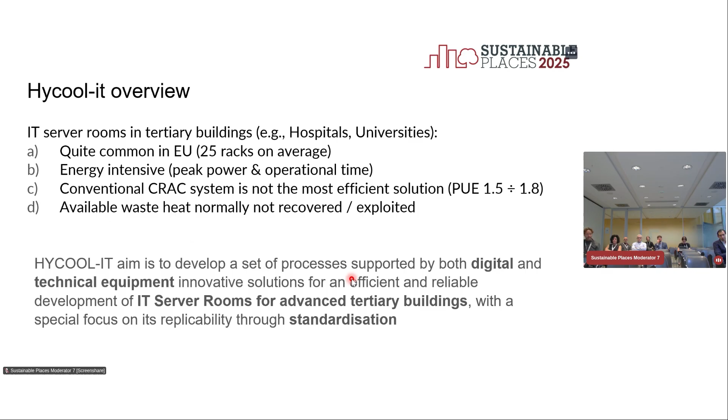So in our HYCOOL-IT project, a European project of 3 years, we are now in the middle of the project. We are trying to tackle it from a different point of view with digital solutions, but also hardware solutions, and then deploy and exploit it in terms of standardization.

The consortium is made of 9 partners from 5 European countries. From Italy, Politecnico di Milano Department of Energy, CNR where Valeria works, R2M where Sander works, and then we have IMP from Serbia, Sorption Technology from Germany, who developed the absorption chiller, one of the technologies, and we have Comet with Fausto, who is here.

IDP, we have some colleagues around from IDP, and BDTA, the Building Digital Twin Association. We will talk about Symbot, and there are other sessions where they talk about this approach. And then we also have the European Innovation Market, both based in Belgium.

So the objectives are four. The first one is digital: to build the building digital twin, and then to provide it as a product as a service. This is our idea. This digital twin is based on an easy modeling approach, having these symbols, a kind of library where you find components and easily build your digital twin. This is the first pillar.

The second one is about the hardware: developing a rack-integrated absorption chiller done by Sorge, exploiting the waste heat from the server to run the thermal driven cycle. Then we will test it in real operating conditions in our server room in Politecnico. The pilot is our server room at the Bovisa campus, where my office is also located.

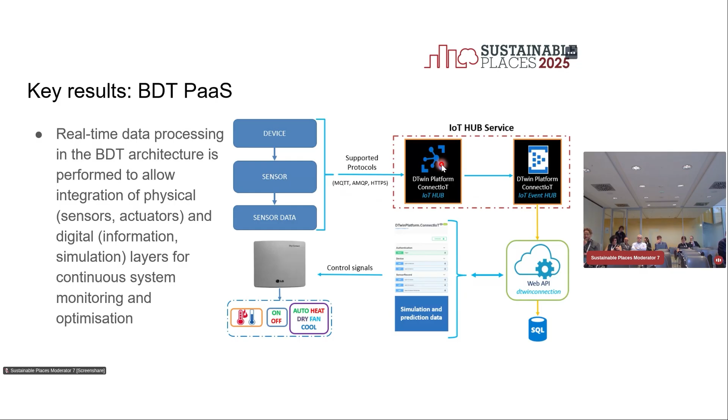Here it's more or less the same, simply looking more from the physical point of view, how it works, and what are the different systems and the different technologies that we are using. But it's again about what I said to you before.

We are working on it, they are working on it hard. They developed the first prototype, they had some issues, and now they are working on the second prototype. Then we will test it in Milan early next year, this is the plan.

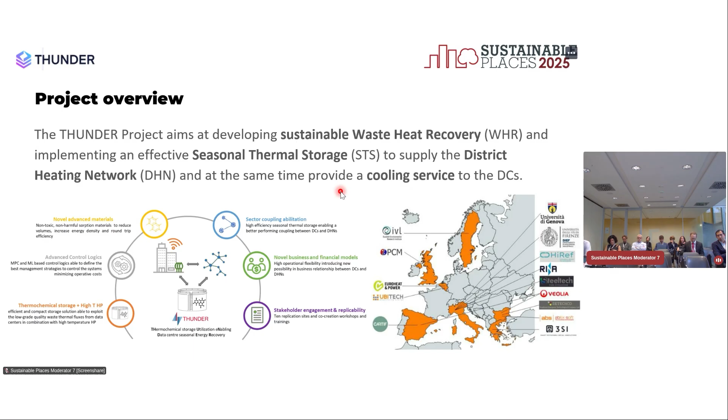So we have this demo site that is a data center with a district heating network. The data center is managed by Avelik Soft, a software company in Bulgaria. And Veolia is managing the district heating network, again in Bulgaria, in Varna. And then there are a lot of other companies involved in the project.

So the main objectives are listed here. Apart from the waste heat recovery and the seasonal storage, we are also testing some systems in order to increase the effectiveness of the storage, like this solar-driven ejector thermocompression vacuum system, in order to create the vacuum into the test cell, into the heat exchanger for the thermochemical storage, to increase efficiency, as well as some other devices that we are introducing in order to increase the capacity of the system.

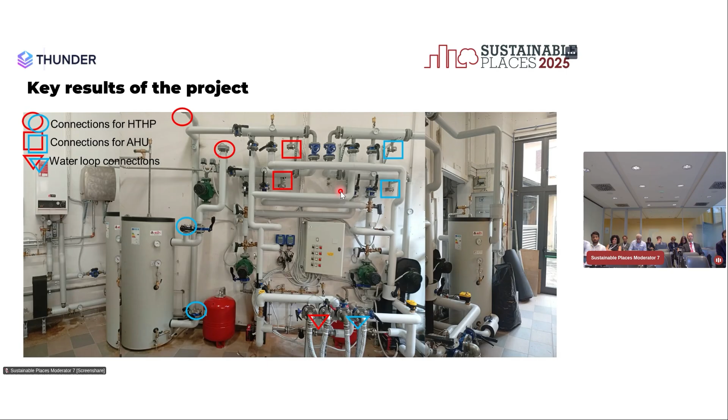Of course, there will be a lot to say, but only 45 seconds are remaining. This is their facility again at Unifi, University of Florence. They are testing several materials, how they perform when hydrating and when dehydrating.

And this is a sort of summary of where we are now. So we are testing TCM 71, that is calcium chloride with a vermiculite matrix to host the calcium chloride. Then they tested the performance of this salt together with vermiculite, and they found nice results. But then, due to some problems in hydrating and dehydrating and heating up and down the vermiculite, we are moving to silica gel.

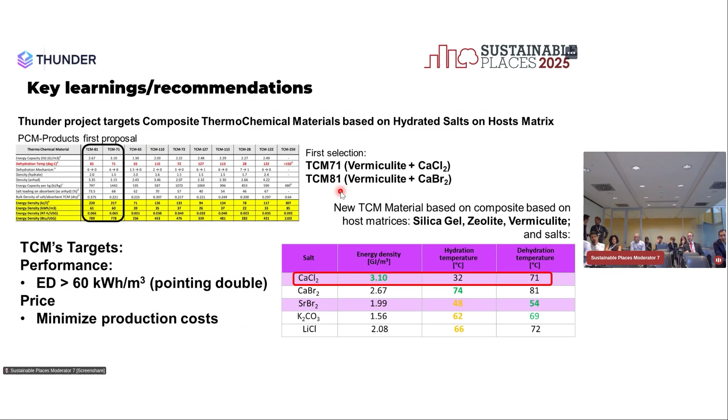Silica gel as a matrix that can host the salt, that is the thermochemical material. And we are finding that the silica gel solution... okay, I'm quite close to finish. They are finding that the silica gel as a host matrix could work even better than vermiculite.

And to close, yes, but this is just to mention the design phase. We are dividing the system into several components. This is quite similar to the other slide. Just to say that we are also designing the control part that is quite important to define as an objective of the project. Thank you, and see you later.

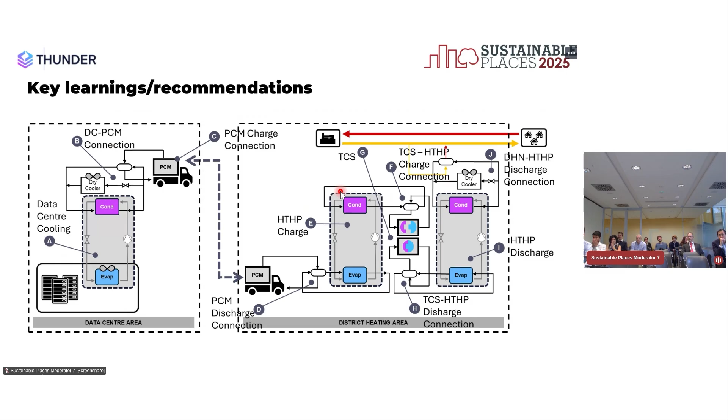Good morning, everyone. Thank you so much that I get the chance to present our Horizon project, moderator. My name is Yannick Graben. I'm from the Competence Center for Thermal Energy Storage in Switzerland, in Lucerne, at the Lucerne University of Applied Sciences and Arts.

To give a quick overview of the moderator project, the way we work with data centers is we focus all on the waste heat recovery system. We work with an immersion cooling system where the goal is to achieve a system with the highest possible temperature without a certain amount of thermal degradation of the server racks. Then we use the waste heat, this intermittent availability, and store it in a newly developed phase change material that I will go deeper into after.

The third and last part is actually setting up the insulation material for this storage system. Then we also look into different case studies that we have within the project, so we look at different locations. We determine 3 locations with different server units or different data centers, and there we really look into how we can use this waste heat that is stored in these phase change materials for other uses, such as industrial applications, greenhouses, and so on.

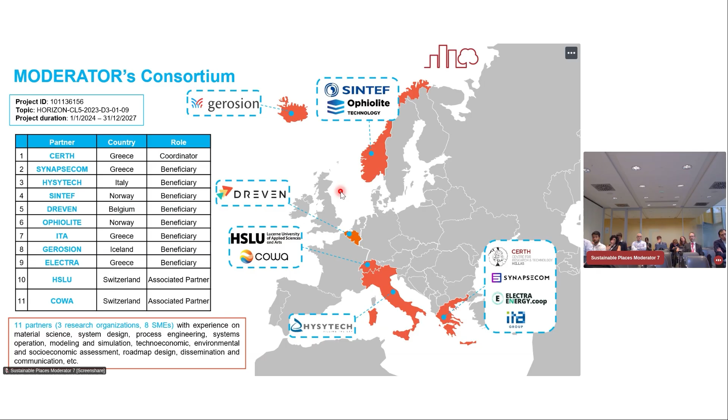What I will go into now is something that we are mainly working on, the material studies that we have done. It's a 4-year project, and we're halfway into the project with the first report that we had to deliver at the end of last year, which was on the material development and testing of these new phase change materials that should be applicable within this temperature range of 40 to 60 degrees, which is what's allowed to operate an immersion cooling unit in.

Then I will also look a little bit into the next task that we have to submit at the end of this year, which is really the system design, so how do we design the immersion cooling unit connected to the PCM storage and how it is operated.

So we have actually developed 3 materials within the project, within this target temperature range. We work with salt hydrates mainly because they're cheap, non-toxic, and available. Basically they're food grade, so they're also used in many food industries. We have 3 materials.

In the end we focused mainly on this PCM 58, at a phase change temperature of 58 degrees C, and PCM 45, where we have now over 1,000 cycles tested of the materials within the testing unit I will show after. In the end, we selected PCM 45 for our first prototype because the phase change temperature is just low enough to be charged with a server unit. There's always this trade-off: if we increase the temperature in the immersion cooling unit, the servers will run less efficiently, but we cannot charge our phase change material otherwise.

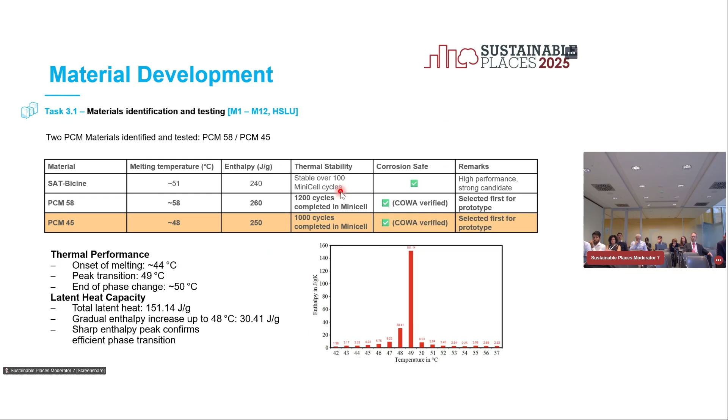Then the second step, how we test this material. This is a setup which is the so-called mini cell setup that was also developed within this project. The goal here is to test PCMs at larger volumes, because everyone that has worked with scale-up production of phase change material knows this. You can test the material in small batches, but as soon as you go into several liters, it behaves totally different.

So this has a volume of around 0.6 liters, and what you can see there is tests all the way on the left is fully crystallized, then semi-charged, so semi-liquid, say 90% charged, and then 50% discharged again, so the crystallization process. Here it's also really important to observe visually how the material behaves. So do we have segregation? Do the additives settle down in the materials and all of these processes?

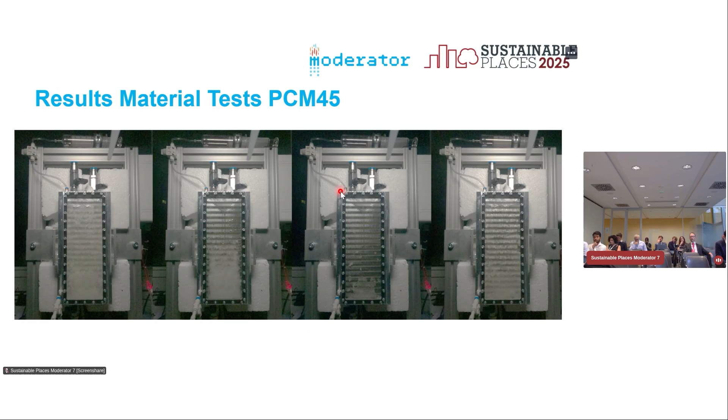Then the next step, what we're going to do with this material - together with COWA Thermal Solutions, we actually developed a larger storage unit, which is this so-called compact cell. It's a 120-liter unit, and within this targeted temperature range, we are able to store around 12 kilowatt hours of thermal energy.

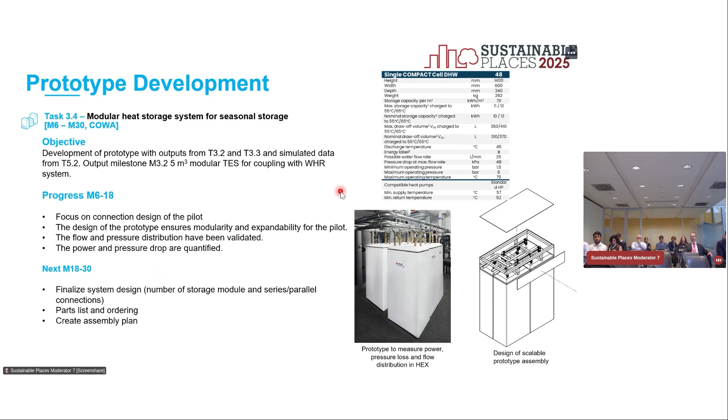To sum up, we have achieved now two materials within this temperature range with a stability over 1,000 cycles. But of course, this has to be tested also close to the application, because all of the cycles were pretty similar - similar temperature distributions, similar kind of boundary conditions. The mini cell that was developed proved its test setup before the real scale up to larger material volumes. It's really important to point out the importance of this PCM testing as close as possible to the application, so larger volumes and different charging temperatures like semi-charged systems and all of that.

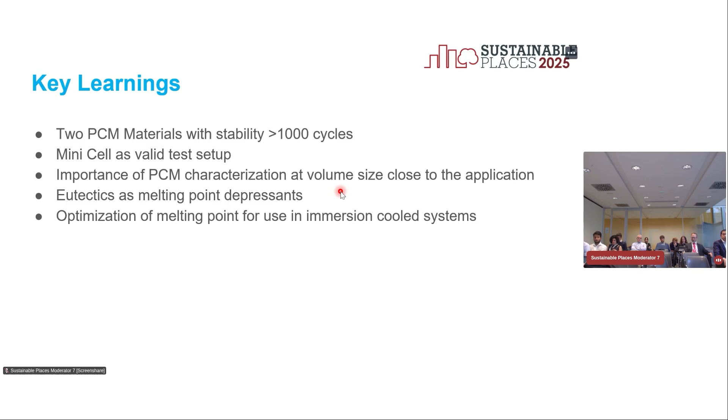We used eutectics to depress the melting point of the phase change material. I will not go deeper into the material composition because COWA still has a patent pending there. It's really important to optimize the melting point for this immersion cooling system to get as close as the operation temperature, but still not have thermal degradation of the server units.

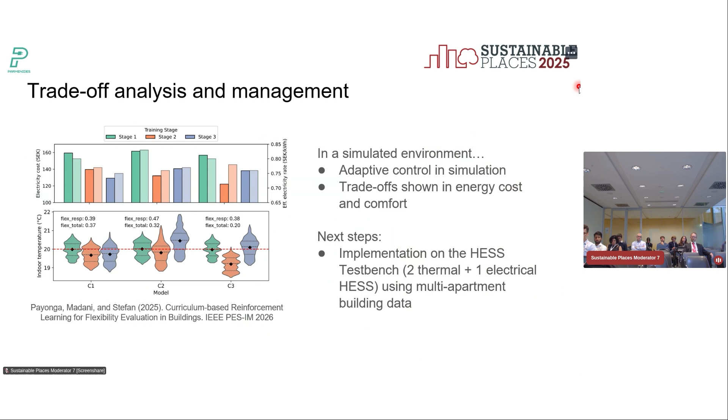So after this, the next step is to implement it. This was tested in a simple simulation environment with a simple building, as a proof of concept, to see how we can actually measure these trade-offs. The next step will be to implement that algorithm on the test bench using multi-apartment data.

Apart from that, there are other project results. The Parmenides Energy Community Ontology has already been done. It was finished last year, and it's now being used by the EMS for HESS developed by MAPS, and integrated in Austria with grid capacity management.

Now, for the key learnings and recommendations: we assert, and we have shown, that there are trade-offs. I think we need to accept that there are trade-offs among optimization objectives, and we have shown, and will continue to show, that these can be measured and managed.

We want to measure them and show this information to stakeholders, because we are also aware that participation of stakeholders in flexibility provision relies upon the assurance of how much they're willing to trade off so they can contribute. Most of the time, flexibility provision is only framed from the perspective of the grid, that you are giving this flexibility so the grid will be safe. But how about the perspective of the user? And we're doing that here.

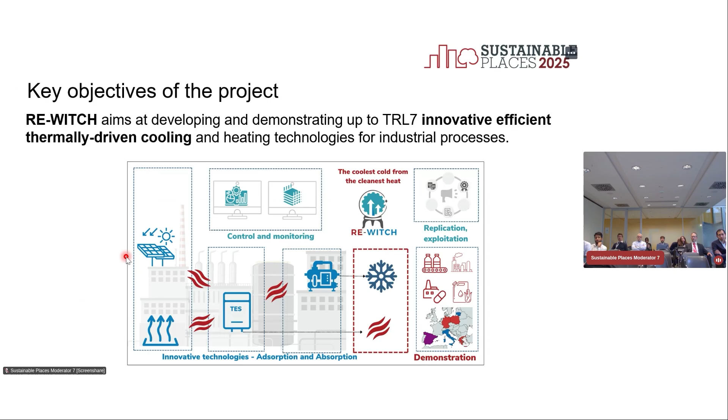The main aim of RE-WITCH is to demonstrate up to TRL 7, 2 different solutions for thermally driven cooling and heating technologies to be used within industrial processes. This is the general scheme of the project. We are now going to analyze this more in detail.

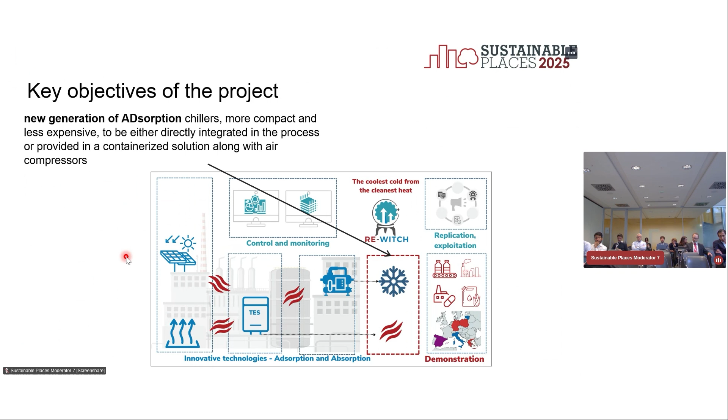The two main technologies that are going to be developed are a new generation of adsorption chillers, which use a solid sorption system that should be less expensive and more compact than the state of the art, able to be integrated in processes or in a containerized solution, and 2 new versions of absorption chillers, working with liquid solutions, that should also be made more flexible in terms of range of operation by including a mechanical compressor.

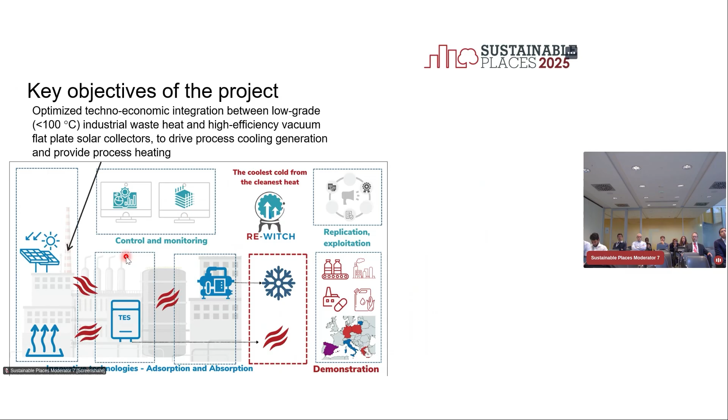In addition to that, there will be a new or best integration with solar thermal collectors. The solar thermal collectors are being developed by TVP, a Swiss-Italian company producing flat plate vacuum solar thermal collectors that can be used in a range between 70 and 130 degrees C. Of course, integration could also be done with waste heat. Then there's...

a PCM-based TES system that is being developed by the University of Birmingham. There are 4 demonstration sites that cover different possibilities. These are a brewery based in Poland, a recycled paper industry based in Lucca, Italy, an agro-food industry in Spain, and a biorefinery in Greece.

In addition to this, there will be 3 replication sites that will test the solutions in a kind of open loop computation. This is the solution on the adsorption chiller, for which we are collaborating with Adsorption Technologies to realize it. It is based on a patented solution by Absorption Technologies, which is a little bit different from the standard systems.

I don't know if you are familiar with adsorption systems, but usually the way they're made is that they have a container where you have the heat exchanger with the material, and a container that could be either in the same vacuum chamber or in two different chambers connected by vacuum valves, where you have the condenser and the evaporator. One of the main issues that has historically limited the power density of this system is that since these systems use mostly water as refrigerant, the condensation and evaporation are quite inefficient.

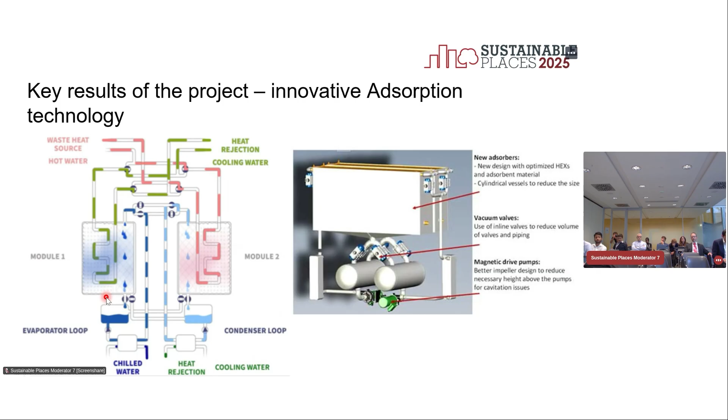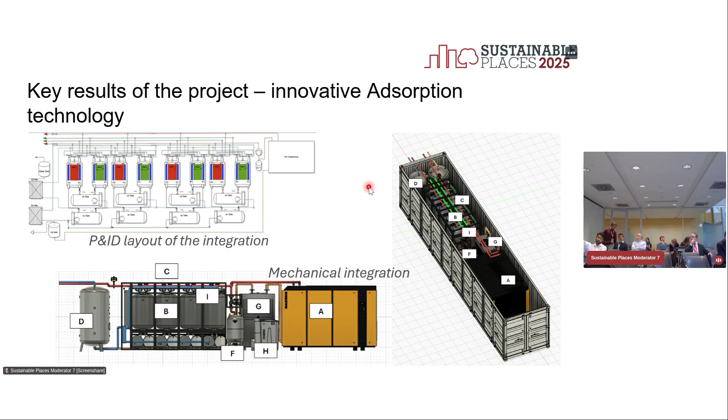This is the design of the system for the various pilots. You can see that this is thought for quite large scale, meaning that each module is 50 kilowatts, so this is a 200 kilowatt cooling system. It was arranged so it can be realized in a single containerized solution that is shipped, pre-assembled at the Adsorption Technologies site, and shipped to the industry. The industry basically just has to connect the water pipes and the electric system, which should improve the acceptance from the industrial sites.

Then this is the solution on the absorption system side. I apologize because I don't have all the specific technical knowledge on this. It's being developed by the Technical University of Munich together with BS Nova, a company from the Bälz Group. This is the absorption cycle in which they included a compressor inside to increase the temperature lift.

This allows providing both heating and cooling at the same time, and also gives a better range of operation. The compressor used is similar to the turbo compressors used in the automotive industry. That's more or less the derivation, and it was designed by TU Munich.

This is the integration that is done with the BS Nova systems. The compressor is connected on the outside, and there's a system used to define the operating pressure level for the compressor. This solution allows very minimal modification to the standard chillers by BS Nova, while greatly increasing the possibilities for the application.

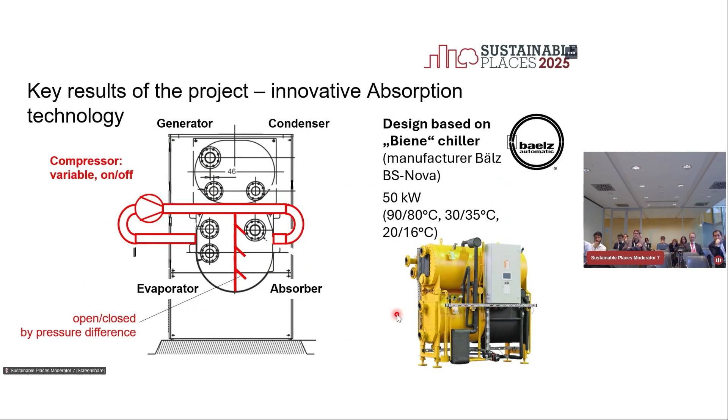Regarding key learnings and recommendations, we saw that for both the adsorption and absorption systems, one of the main problems so far that needs to be solved is finding a way to have a standard or simplified method for designing them, because there is a need for careful knowledge of the process where these systems are being integrated, which somehow complicates their use and replication across industries.

Then it was also seen there was quite a lot of work being done within the project on the industrial stakeholders' acceptance. We saw that all of them asked for proper business models, for example some kind of ESCO-like models, where chiller and heat pump manufacturers need to have agreements also with solar thermal system manufacturers if they want to install the entire technology package. A lot of industries also expressed the desire to have a kind of business model where they could have it as a service.

That's why I was mentioning the ESCO-based model, so you could have zero capex installation, and then the company takes some of the revenue. The companies that install the system could get some revenues out of this. Also, the BIM-based engineering being developed by IDP is an important added value because it really reduces the risk of problems during installation. And of course, there's quite large application potential in different industrial sectors.

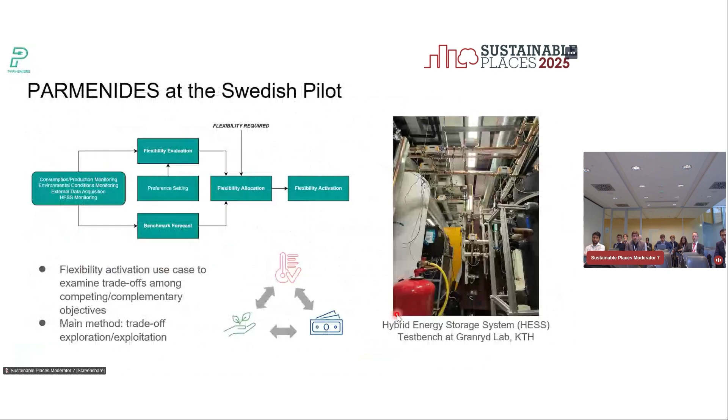And the heat transfer is happening between... so you chase out the heat from the rack on the back side into the surrounding. I missed that, or no, you deliver it away in the water. It's integrated, so everything is inside the rack. There was a scheme, and we're working on it, but yeah, the heat is not going outside.

Then the cold air goes out. So the heat gets into the lower part, into the absorption, and it's used. So we have 3 temperature levels.

The high level, the low level, and the medium level that is here, which is projected then outside. In my final slide, I said we can also recover this medium heat, but it's around 30 degrees C, while this one is around 60, and this should be around 20.

So this 60 degrees you bring to the adsorption module and use it to drive it. That is the fuel, let's say, of the absorption. And then you get out practically how much? 30. The medium, 30, into water.

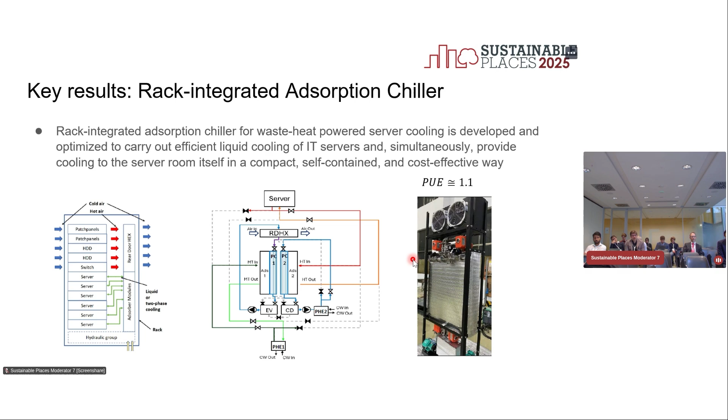Do you have some kind of guess data for the total cost of ownership of one system versus other transportation systems like pipes? This is a very good question - I don't have the answer at the moment, but we made some calculations and found it at least feasible from an economical perspective, given the short distance between the data center and the distributed network. But the idea is to be flexible, not only to supply the data center's distributed network, but any other.

So practically you can have a diverse client group, not only like a pipe serving one client. Exactly - this is also a point of interest regarding the heat on wheels, that you don't have only one client, but you may have several, and in this case you can also optimize the costs. That's very interesting - I would like to speak with you about this. If you want more details, absolutely, you can email me.

But there are cases where they are already transferring heat, not all the district. There is some district heating pipes, but part of the clients are being served through this. Because some clients, in some conditions, it's better to have spot supply of heating instead of direct connection. As you are saying, the capex are lower, and it's only a matter of OpEx that maybe are higher, but it's a business plan that in some cases is more profitable.

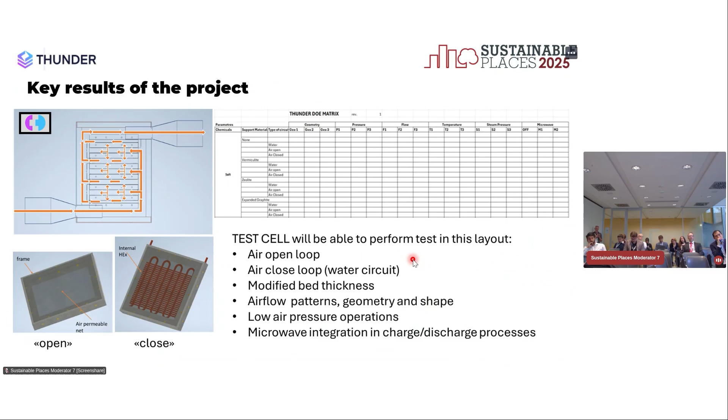Water lines, so why do you have an open system with air for the TCM? No, because we are testing both possibilities, to have water circulation in an enclosed loop, but also air. So this is something that is being tested at their facility, and then according to some results we will see whether to use this water exchanger or air, which needs another exchanger.

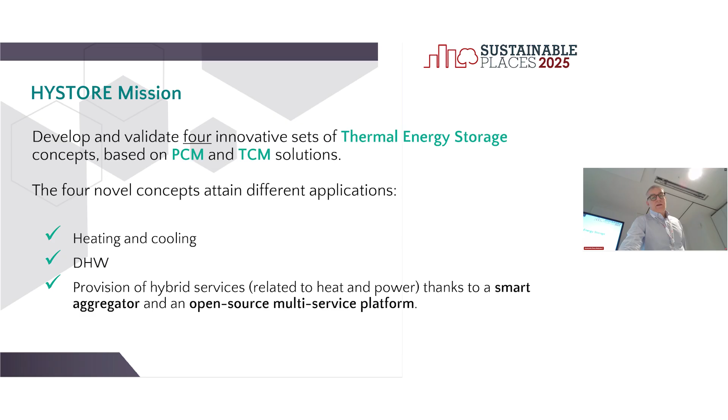Important things that I have anticipated at the beginning: we want to improve the integration with the grids and increase the flexibility by collaboration with an aggregator that will exploit an open source platform developed by a partner. The objective of the project is to increase the energy density with respect to the state of the art of thermal energy storages, reduce the capex, which is one of the bottlenecks of innovative PCM or TCM solutions. To bring it to TRL9, we want to enhance installation efforts and create a business model that can be compared to lithium batteries' prices and market penetration.

Here you can see an example of what we have now. So we have some thermal energy storages integrated at building level and the grid connected to the building. So we don't have a direct connection between thermal energy storage and the grid.

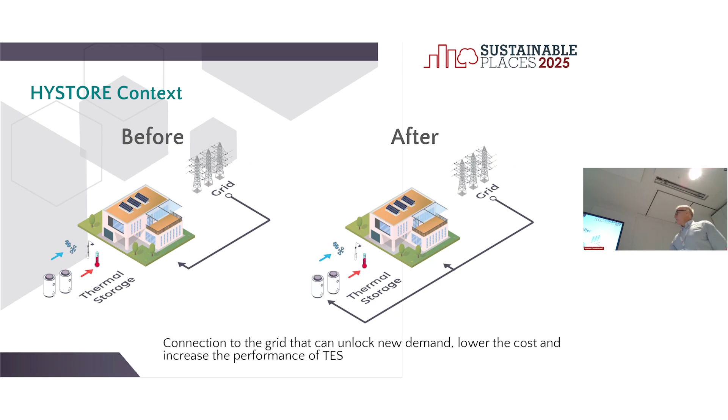The concept that we want to demonstrate and validate is improved connecting of the thermal energy storage to the grid. In detail, it can become this picture, which represents the flexibility enabled in the buildings and the different players that can be included in this value chain.

For example, we can have direct connection of grids to the thermal energy storages. We can use an aggregator that can manage the flexibility of the grids. The aggregator can also connect different types of renewable energy systems, such as PV systems, solar thermal power, etc. We have a technology that has to control the flexibility into the grid, and we can also integrate consolidated technologies such as heat pumps. Obviously, this approach needs to be scheduled, because in order to optimize the cost and prices, the scheduling becomes fundamental.

Here you can see the 4 demos where we are testing the solution. The first is in Austria, in Langenwang, where we are testing PCM technologies integrated in a heat pump solution developed by Ochsner.

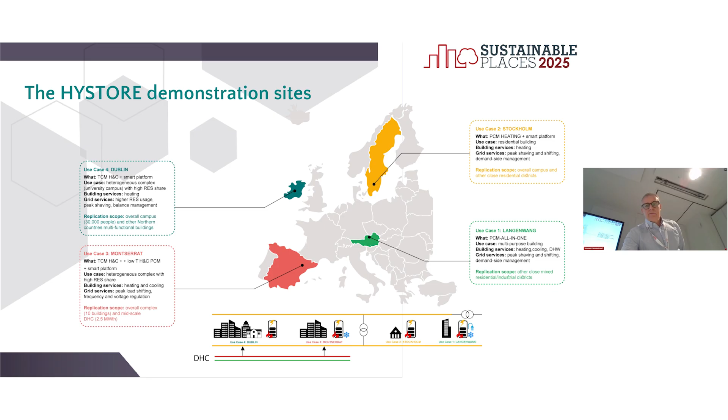Some results, main outcomes from the project, are 4 different configurations for the PCM unit. The first outcome started with a deep analysis of the market of PCM in order to select the best material that can be integrated into a heat store. We developed a PCM all-in-one unit by integrating this solution in an Ochsner heat pump.

We also analyzed different configurations for low temperature heating and cooling. The PCM low temperature will be cooling driven, and the PCM heating solution will be more related to heating services. The PCM unit I mentioned will cover 1 month of storage capacity.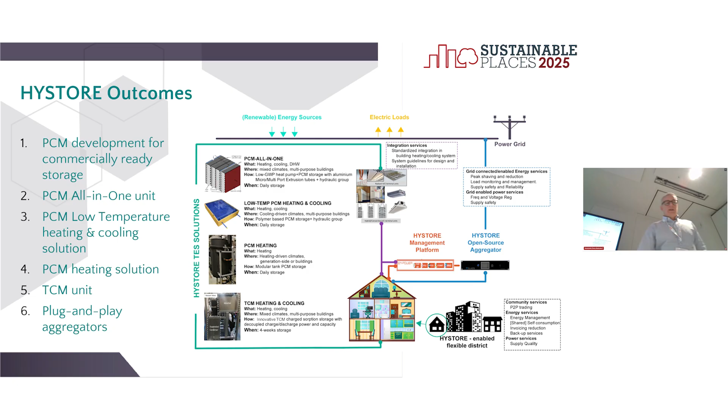An example of a PCM all-in-one solution integrated in heat pumps that has a particular design to increase the efficiency of this PCM unit.

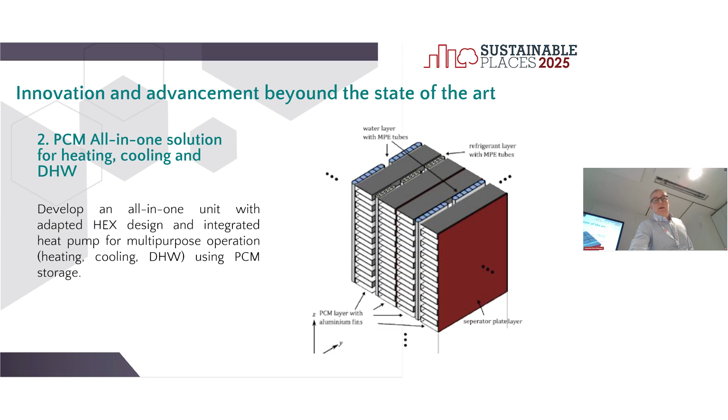Another particular configuration exploits a capillary matrix-based design for PCM modules. And this is a configuration of the heating solution with low heating temperature, exploiting the heat pump connection.

The last one, number 5, is an example of a TCM heating and cooling solution tested in the CNR. In particular, we use zeolite materials for the thermal capacity. So we encountered different technical problems for...

...and we solved this problem by testing different kinds of technology for the research, for example with direct electricity, and with other kinds of solutions that are tested in the laboratory scheme.

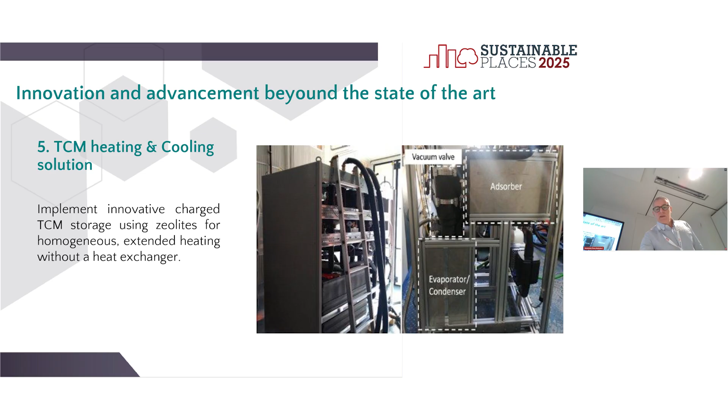The last one is this module that will be produced for commercial scope, enabling the flexibility. So this is essentially the hardware that will be integrated in the buildings, and that permits the dialogue with the aggregators and the management of the flexibility at district level. So essentially, that's all for my side.

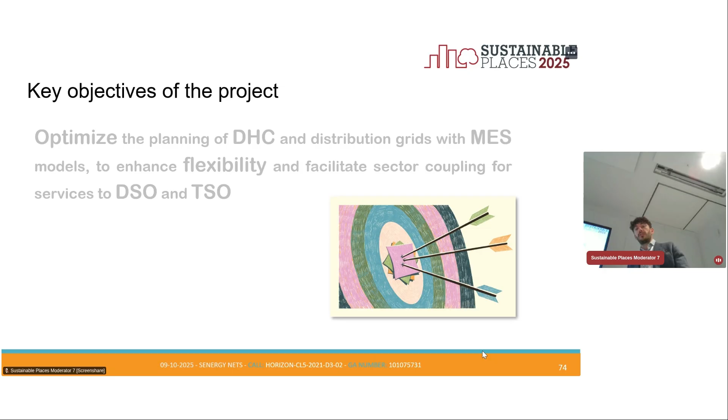I already told you about the Canavese Italian demo site, but it's not the only one. We have three demo sites and two case studies in the project. Let's start with number one: Italy, in Milan, Canavese. We have a district heating system that is really differentiated because of its size. I'll give you some numbers later, but it was pretty challenging for us to optimize such a hugely extended system.

So that was demo number 1, now let's move to demo number 2: a demonstrator in the city of Ljubljana, Slovenia. Also in that case we have a pretty spread area to cover. The goal for demo 2 is to go from a 3rd generation to a 4th generation district heating and cooling system. We're still talking about pretty high temperatures, but the energy efficiency of the total system will gain some advantage from this change.

Then the 3rd demo site is in Paris, named Îlot Gaîté Montparnasse, a commercial center. You can imagine it's a varied demand, because we have offices, commercial spaces, and also a hotel—really different types of demand. What's really important to highlight here is that we have a 5th generation district heating system, and there aren't so many of those in France or in Europe. So for us it was a real innovation, and really nice to have the opportunity to develop our models in this plant.

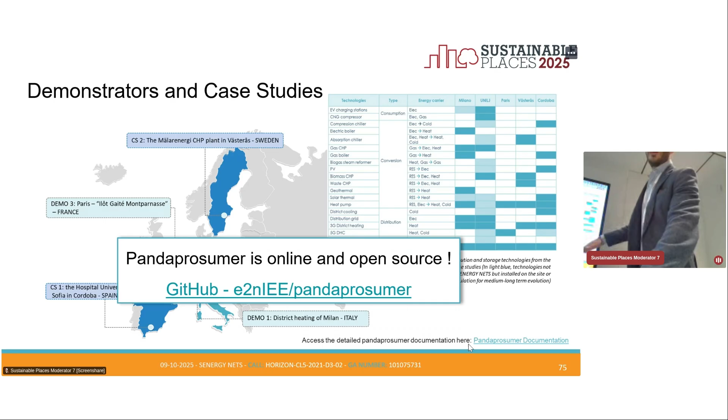I want to add some more information now on the Canavese plant, since time is running out, and the goal was to share something that is not online, not public yet, because the Canavese plant has been our first demo case where we ran the optimization model. So we actually saw the results of our work.

Just a brief introduction. You can see here we have, of course, the electric and heat sides. We have three separate CHP units, 3 gas boilers, 2 heat pumps, thermal storage, and also an electric boiler.

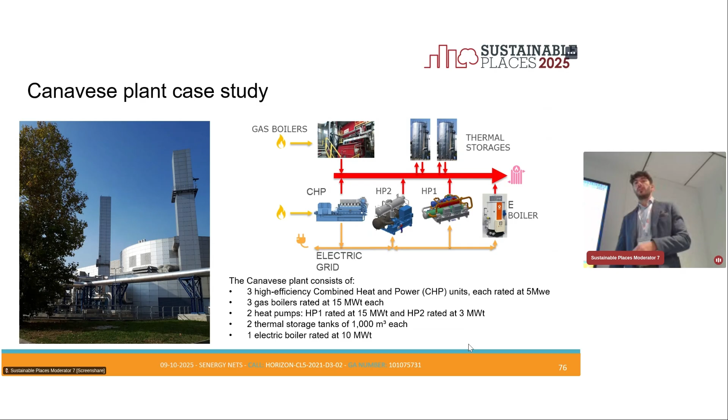Here it's a bit small, that's why I tried to show you case by case. We had 3 case studies that were the primary ones we wanted to develop and try to see what's going on and what we can optimize.

So first of all, we worked on the long term. The idea was to try to understand, in the long term, how much availability of flexibility we can get thanks to our models.

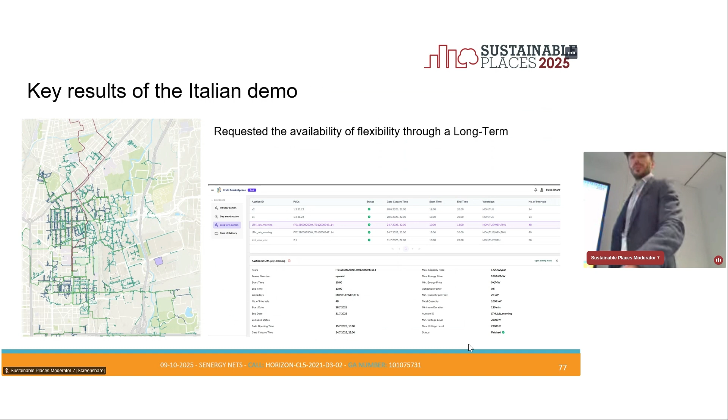Then the second one was for the day-ahead mechanism. So for the day-ahead, what we were trying to see is: can we activate flexibility, and if yes, how much? Because if you remember, the main goal is the big word flexibility through the day-ahead mechanism.

And finally, a more challenging goal: what we were trying to get was additional flexibility in case of congestion. So in case of crisis, or unexpected demand, what we are going to do is try to get some flexibility to cover the demand. And this is how it looks like.

And finally, that's my conclusion slide, the key results of the Italian demo. I'm unfortunately not an expert on that, and these are really fresh results, but I really wished to bring them to the conference today. What you can see here on the left, it's very small, but basically this red here is the threshold, the flexibility that we were buying, that we got.

What we were trying to do was avoid having the flexibility go over the threshold at peak. Of course, buying this flexibility has a cost, so we have to find the right ratio between how much flexibility we get and how much this flexibility costs us.

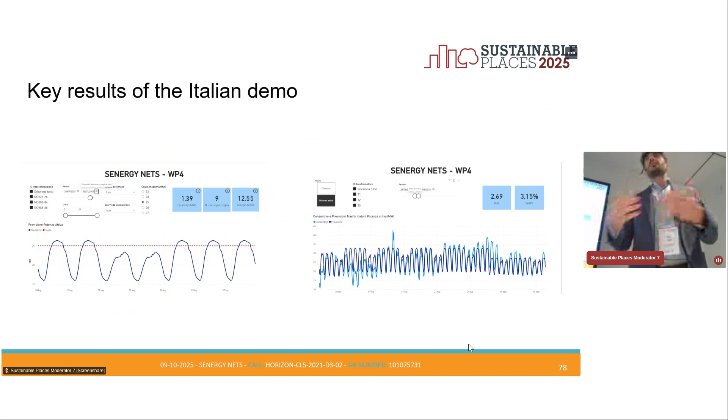Have a perfect timing. Next is, Push2Heat.

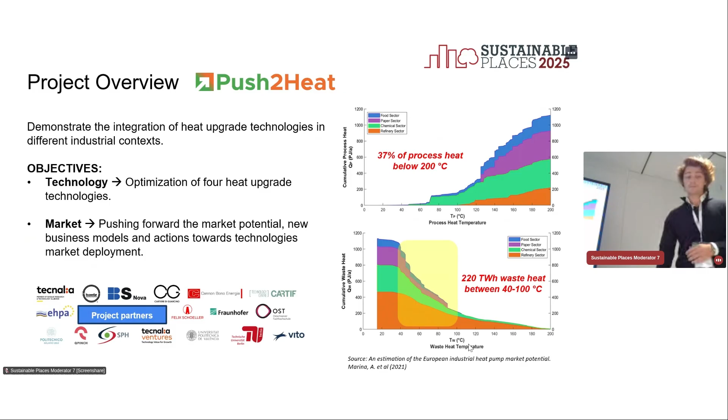On the bottom, you can see we have many different partners from all around Europe. As I said, Push2Heat has 4 different heat upgrade technologies that will be installed in 3 demo sites.

Here's just a small overview, then we're going to see the demo sites more in detail. Demo 1 is installed in Germany, demo 2 and 3 are installed in the same place here in Italy, and demo 4 instead is installed in Belgium.

Now we're talking about the demo sites. Demo 1, as I said, in Germany, is a paper mill in Weissenborn. The technology here is a vapor compression heat pump that will recover heat from the paper machine dryer, around 700 kilowatts of heat, and it will upgrade the heat generating steam at a pressure of 2.3 bar with an electrical COP of 2.3.

You can see here a timeline of the installation. Now the machine has been manufactured and integrated into the demo site, and we are actually receiving the first data these days. We will see more in the next months. On the bottom is an image of the technology and of the demo site.

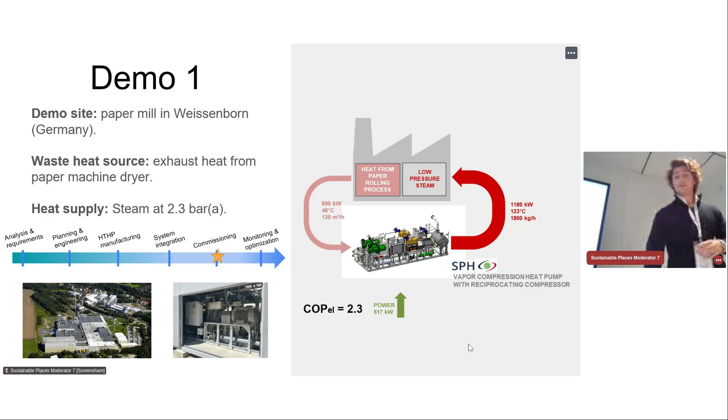Regarding demo 2 and 3, these are also installed in a paper mill in Guarcino, close to Rome. The two technologies are, again, a vapor compression heat pump, but this time coupled with a vapor recompression, and an absorption heat transformer.

Both technologies will receive input heat coming from the cooling water of a cogeneration plant installed close to the paper mill. In the case of the heat pump, this will upgrade the heat, again in the form of steam, which will then be recompressed with the recompressor. For the absorption transformer, the same thing happens, but in this case vapor will be recompressed through a thermocompressor.

The status of these two technologies is that the heat pump has been manufactured and is going to be integrated at the end of this month, while the absorption transformer has already been installed in the demo site and is going to be commissioned pretty soon.

The last demo site is demo 4. This is installed in Antwerp, Belgium, and in this case the industry is a chemical industry, and the technology is a thermochemical heat transformer.

The heat it will receive comes from an exothermic reactor, and again the heat will be recovered by the thermochemical heat transformer and reintroduced into the process as steam. This technology has already been installed and is actually right now being monitored and optimized for the demo site.

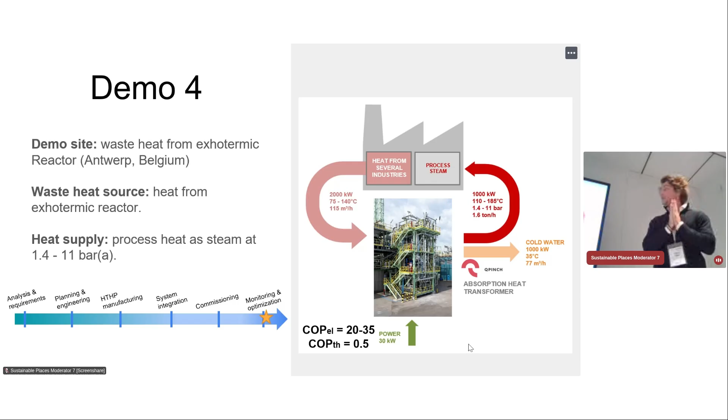Other than developing the technologies and installing them in the demo sites, we have to monitor them. So we have developed a common monitoring protocol across all the demo sites. The system is now being installed, and the objective is to give evidence of the performance of the heat-upgrade technologies and to be able to compare them across the different demo sites.

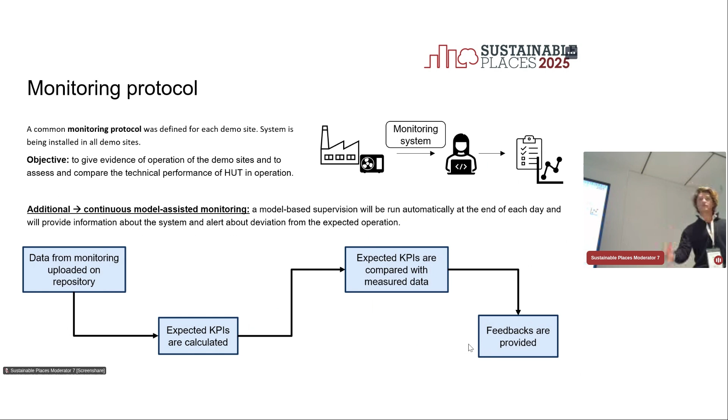Moreover, what we are doing right now is developing a continuous model-assisted monitoring, meaning there will be models of these machines able to compare the KPIs calculated with the model to the actual KPIs. So you will compare these two and provide feedback on the operation of the machines.

And last two slides: other than developing the technologies and this monitoring protocol, an important thing is also to disseminate awareness about heat upgrade technologies. So a huge part of the project is developed for dissemination. In that field, we are doing replication studies, meaning that this technology will be modeled and then replicated in different industries or other sectors.

For example, here is a case study that University of Valencia has been doing about district heating. It's a real case in Italy, in Lombardy. This system right now is producing around 60,000 kilograms per hour of hot water at 110 degrees, produced by a boiler and cogeneration plant. But there's a chemical industry close to the district heating which has around 8 megawatts of waste heat in the form of pressurized water at 33 degrees. So the idea is to install a heat pump to recover this heat and replace the gas boiler.

And the heat pump, since there's a very high lift from 30 degrees to more than 100, was modeled in EES, which is a simple software. It was a double stage compression heat pump plus vapor compressor, again for the high lift.

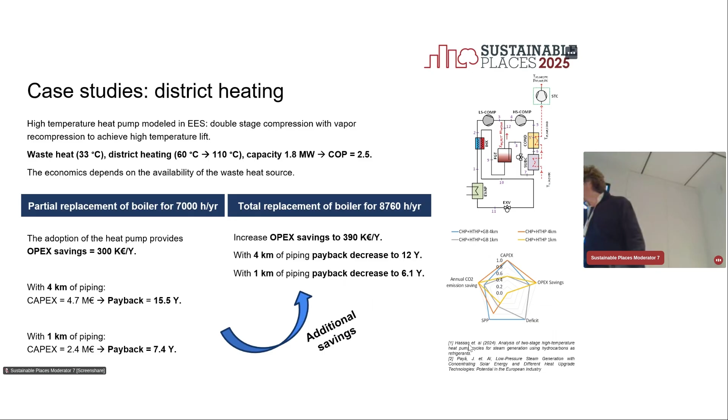If we consider increasing the availability of waste heat to the whole year, the operational savings will increase and the payback time would decrease. With 4 kilometers of piping, we would have just 12 years. With 1 kilometer, around 6 years.

And these kinds of studies have been done not only in district heating, but also in other industries. So to conclude, let's say that probably the most interesting results will arrive in the coming years, since we will be monitoring the technologies and we will see the impact they would have.

But so far, we can say that high temperature heat pumps able to generate steam at 150, 160 degrees are actually available. And the feasibility of installing them is not really about the technology, but depends really on the demo site. One really has to see if waste heat is available, what's the energy demand of the plant, and some installation constraints that we also faced during the first part of the project.

And with the replication studies, we demonstrated that potential energy and CO2 savings can be achieved with decent payback time. And also that these technologies can be applied to many different industries and sectors. So that's all.

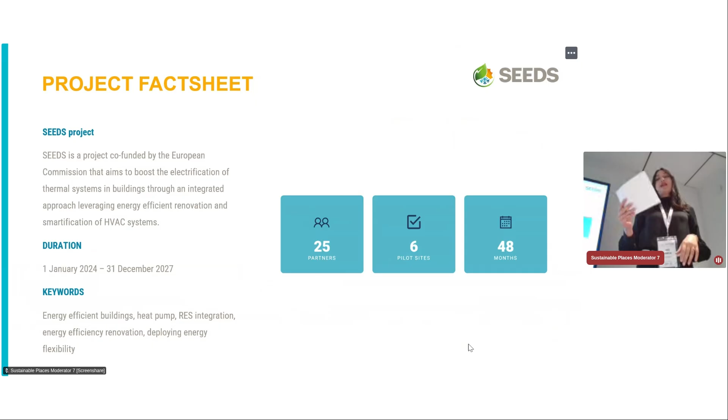So SEEDS is a large-scale European project that started on January 1st, 2024, and will run for 4 years. Our ambition is to develop renewable-based smart heating and cooling systems that can tackle the challenge of cooling and heating systems in Europe.

To do this, we are a large consortium with 25 partners from 8 countries, deploying solutions in 6 pilot sites. They are located in Denmark, Belgium, Slovenia, Hungary, and Greece. So we have 5 countries, but we have 2 pilots in Belgium. In addition, we also have follower sites in Ukraine, and partners coming from France and also Italy.

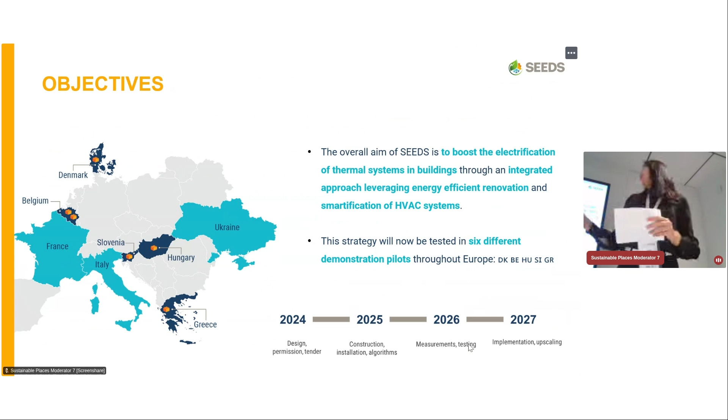Each pilot site involves at least 2 or 3 partners from a strong local ecosystem that ensures the solutions are well adapted in a real context. At this stage, in 2025, all 6 pilots are in the phase of construction, installation, and initial data collection. And of course, the progress differs between each site. I will now go into some details.

So this is our 6 demo sites. The first two are in Belgium, located in Bruges. We have 2 pilot sites focusing on heritage houses that you can see here.

So one of the sites already has a smart heat pump controller combined with the MPC, model predictive controller. This solution will be replicated in neighboring historic districts. So this is the white one, showing how SEEDS can scale in real urban environments.

Next, in Hungary, the pilot is an old apartment block where renovation is crucial for energy efficiency. I was there yesterday in Budapest visiting the pilot site. The building facade is being retrofitted with insulation, and windows have already been replaced, because before they were wooden windows. Building integrated photovoltaics will also be installed to reduce demand and integrate renewable electricity on site.

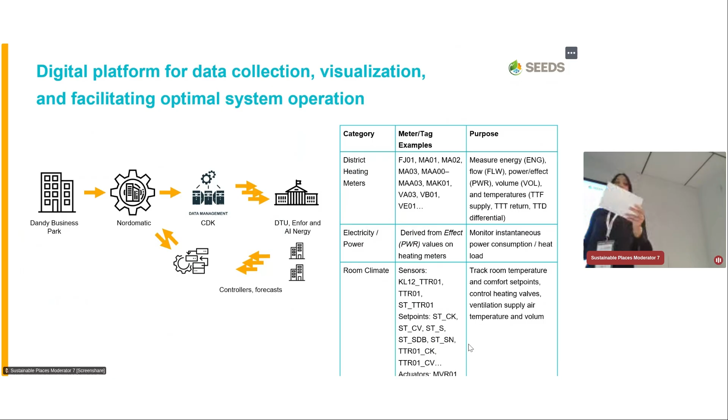They collect the data on their platform, and researchers and technology providers can use this data to develop forecasting and control algorithms. Once ready, these algorithms are implemented back into the BMS, closing the loop and improving system performance in real time.

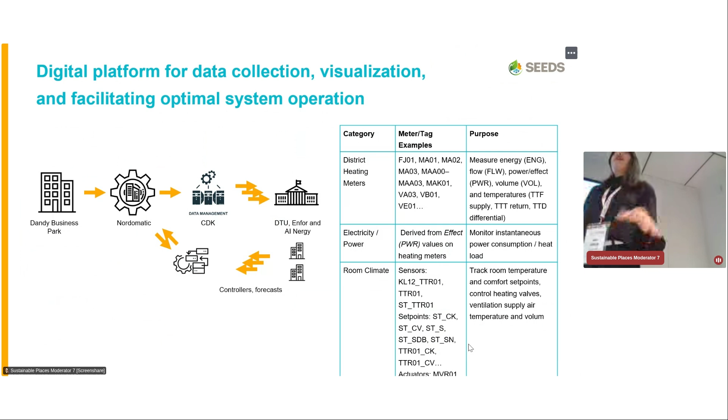To give you a sense of scale, the Danish building has 5,000 square meters of floor space and over 1,000 measurement points, with data collected every single minute. Data collection started in July, as I was saying, and it already provides a rich basis for testing innovative control solutions.

So to summarize, SEEDS is demonstrating renewable electrifying heating and cooling solutions across a wide variety of building types. We have heritage houses, cooling solutions, dormitories, office buildings, apartment blocks, and also 5 petrol stations. The diversity of the sites allows us to prove that the solutions are both replicable and scalable, supporting Europe's goals for energy efficiency, decarbonization, and flexibility. Yes, and that's all.

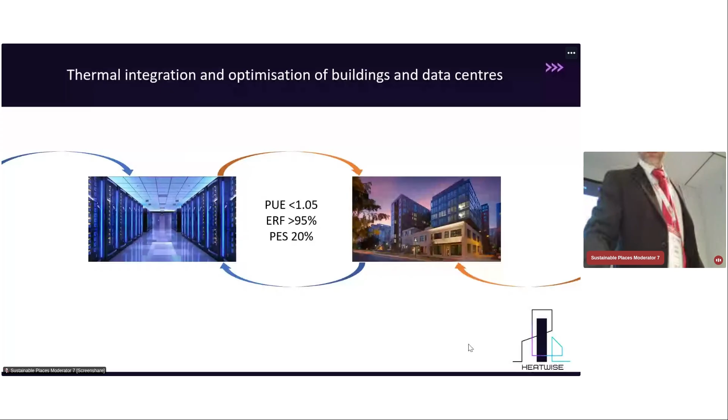We have 3 key KPIs here: PUE, ERF, and PES - power usage effectiveness, energy reuse factor, and primary energy saving. Why are they important? This is how we measure ourselves against others.

PUE is the best or most commonly used KPI in the data center. If it's 1, it means you are not spending energy on cooling - that would be great, everyone would be happy, spending energy only on IT. But this is not the case. The European average is 1.6.

So what we are showing here is that we are able to jump down one order of magnitude. This is a big jump. There was someone who said 1.1, so we try to beat that.

95% means we capture almost all, with some losses, of all heat generated by the IT. Now everything is rejected - I'm talking about the mainstream, not about this particular project.

And PES, primary energy saving, which is a massive decarbonization goal.

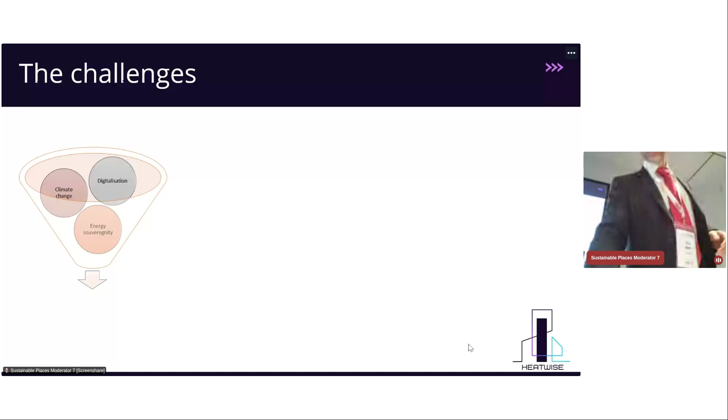So how do we get there - what is the context and what is the challenge? There is digitalization, energy sovereignty, and climate change. These are all social pressures demanding that the industry changes, meaning the energy density of the racks of the data centers is increasing.

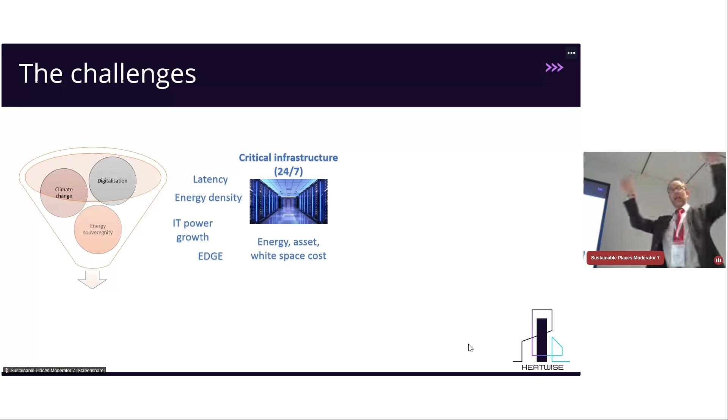What does that mean? How much IT are you able to fit into one rack? The average now is 5, 6 kilowatts, we are building 10, 12. In high performance computing we are around 100, and probably the mainstream will soon be around 50, 70, 100 kilowatts per rack, per cupboard. So it is a huge jump.

Who is able to cope with that? Buildings provide shelter and comfort - this is their primary aim. But they are pushed by social challenges to reduce energy consumption, to contribute to CO2 reduction, and targets are already set for all of them, including data centers. In Germany, France, and Spain there are already such targets for waste heat that we have to think how to comply with.

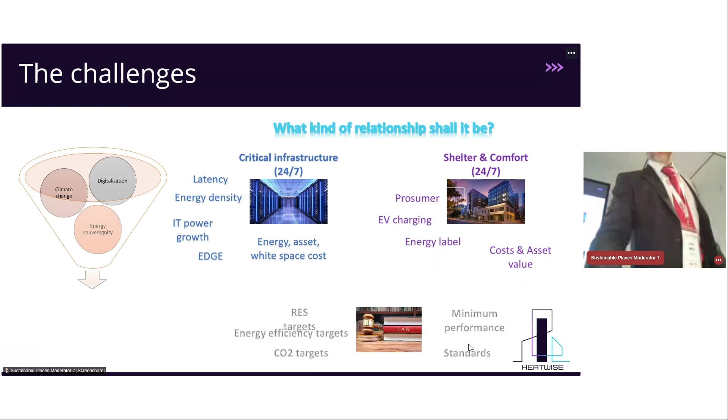So let's see what the problem is. What is the core? We believe the core is the cooling of the data centers. What's the problem with the current mainstream? What is happening actually? Air-cooled.

All kinds of air cooling devices are on the market, using split climate systems, CRAC units, whatever - big machinery or smaller. Anyhow, air is used, and usually around 18 to 32 degrees cold air is blown into the data center, and then around 25 to 35 degrees is blown out into the environment.

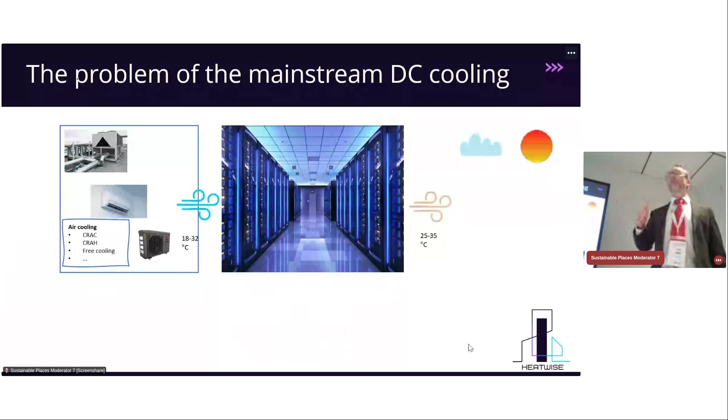So the problem is the machinery is big, and air is a very ineffective heat carrier, energy carrier. There are problems already during summer heat waves - 40 degrees outside, you have to do compression using machinery to create this 18 degrees out of the 40 degrees outside.

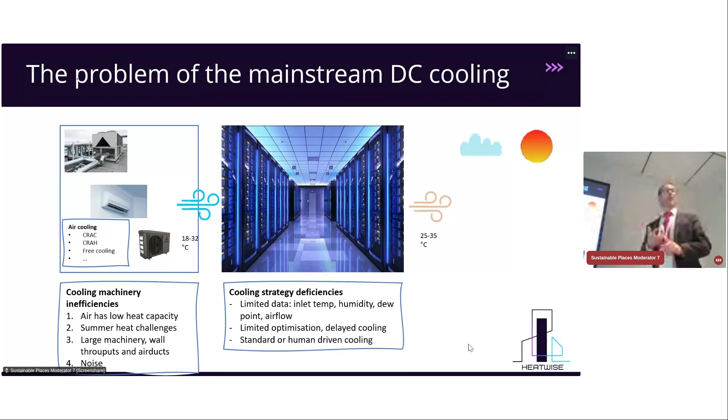Then there is limited data governing the cooling - practically just three data, humidity, cold air temperature, and the amount of air blown through. So what is happening? We are wasting energy - it's going into the litter, let's say.

And actually we don't really know what is happening inside the rack, in the server. Our CPU or GPU may be working hard and sweating, and sometimes it is too cold, it's trembling - because we are measuring this here. Like imagining room temperature, how you feel, measured in a different room over there. Kind of nonsense, no?

So what we do, I'll show you - we look at each component: CPU, GPU, hard drive, memory, motherboard. How do you feel? Can I measure you? Okay, so this is the story.

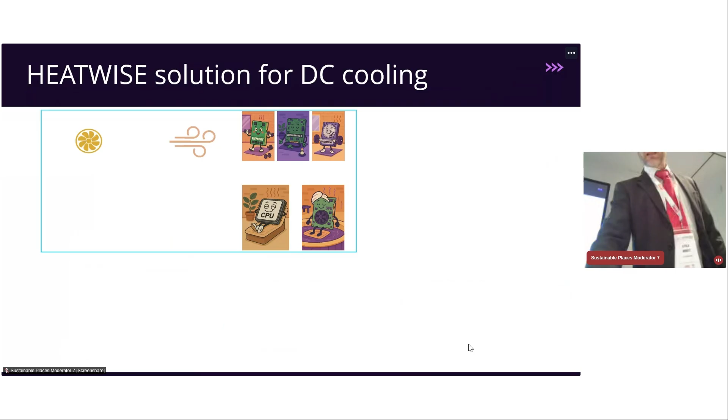And we blow with them - we cool air, we give them liquid cooling, and everyone gets what he needs. Liquid cooling for CPU and GPU, air cooling for the rest, the auxiliary stuff.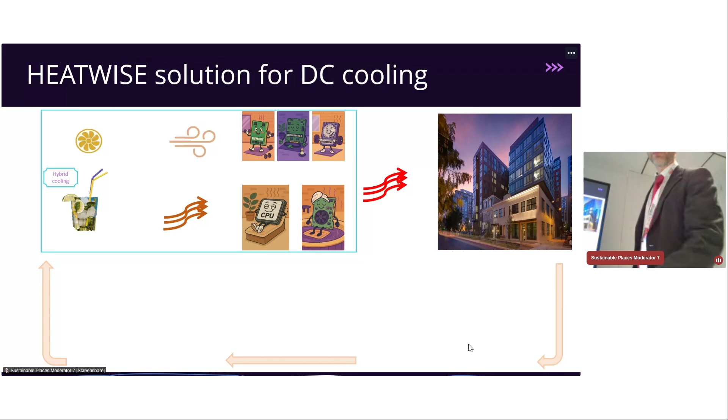And then we collect all this and give higher temperature heat to the building - higher than I showed you previously, so higher than 35 degrees, because as you'll see, in buildings 35 is not so good. 55, or at least 60, is needed if I'm talking about domestic hot water, but even low temperature heating, that is enough.

So how do we get there? We get there by collecting data at each and every stage, on each and every component, and a lot of data also about the building.

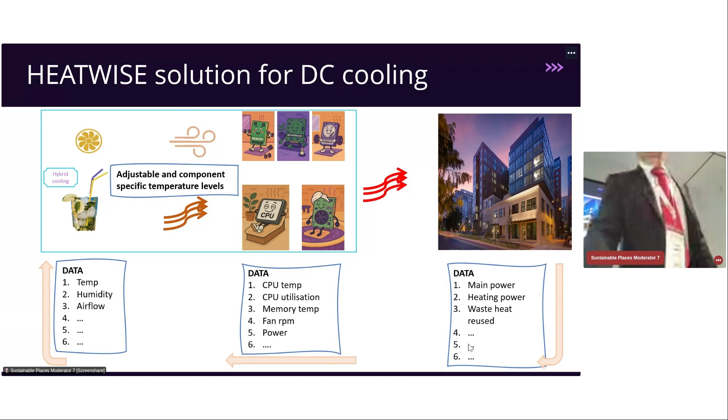So we need a data management platform for that and all kinds of optimization tools. But before I get there, what is our value proposal? We give higher performance.

Throttling is one of the key problems of data centers. When it's too hot, they bring down the compute, and we wait for the CPU to get back to the proper temperature. So we say 95% is IT utilization.

This is huge. This drops a lot the capex and improves the ROI of the investor. Nowadays, 60 to 70% IT utilization is considered good. We keep a very high temperature, 40, 45, up to 65 degrees. That is great for a building already.

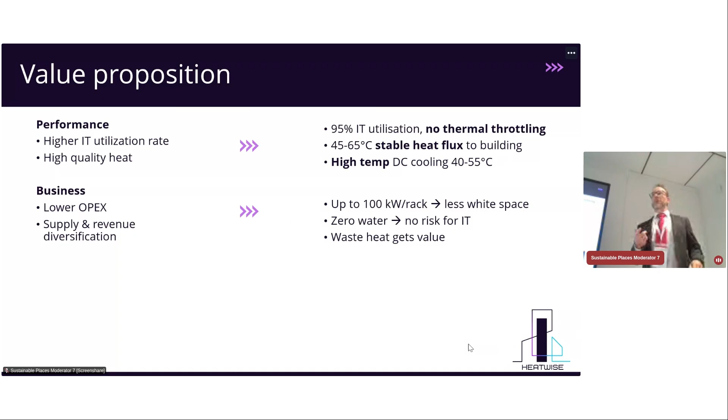All this we do without additional heat pump, additional absorption chiller, no compressor work. So that is good for the business, less capex, and we believe very good OpEx.

We can go up to 100 kilowatts per rack. That is our future. Now we are testing around 20 kilowatts.

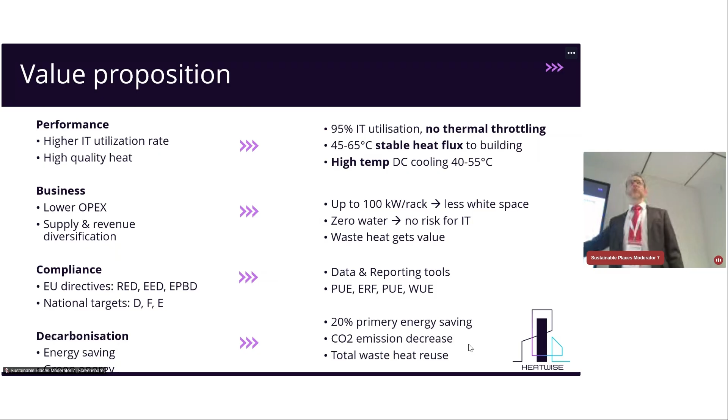You can comply with the reporting that the policy puts on you, report on all the KPIs that are demanded, and as I mentioned, you contribute, you become great. You can talk about that.

So, where do we come from? We come from 8 countries. We have 5 pilots, 2 very important pilots where all the novelties are being implemented. This is in South Sweden and here in Switzerland. The other countries have benchmark pilots where we are deploying analytical tools.

I don't want to spend much time on this, but we have a history. We started thinking how to become more efficient already 10 years ago, and then we did the Boden type DC. We were focusing very much on the building and how the air is running around. We reached PUE 1.02, okay.

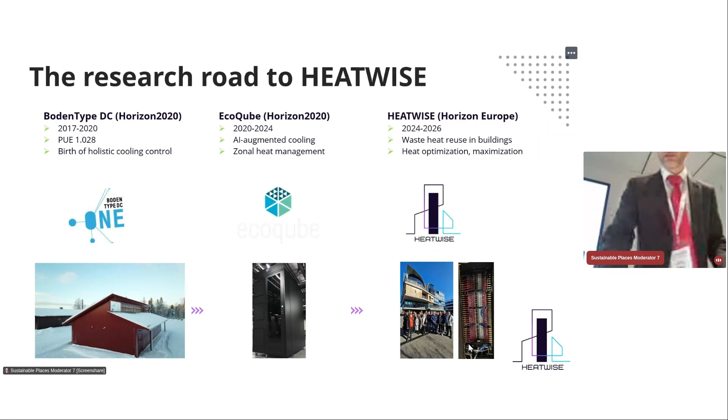So then we focused on zonal heating, we got to the rack level, and now we are getting inside the server and connecting with the building. So we have novel methods for analytics and planning, okay.

Hybrid air and liquid cooling. Liquid is not water, okay, it's a dielectric phase-changing material. Dielectric meaning you can pour it on your computer and nothing happens - it's not electrically connected.

Building control - we are developing a holistic cooling control for the data center, handling a lot of data, and the marriage strategy, so how this is going to work together, one and the other. Both of them are independent; they say my needs are most important.

And finally, without business, as someone already mentioned, this is one of the most important things. Is it going to be ready to be taken up by the market? Is it going to pay back ever?

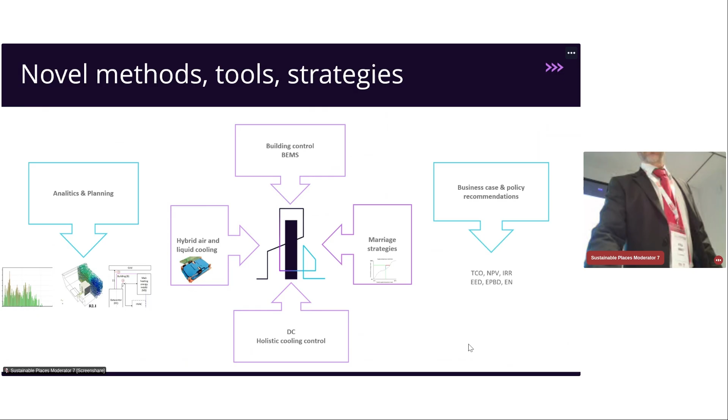So for analytics, we developed an analytical method to estimate the heat potential, or waste heat absorption potential, of a building, and what is the potential that this building is able to store energy, and what is its flexibility.

Then we put next to it a metering strategy - where to meter, what to measure, data. It matters where to measure. One of the key findings is: measure not too many places, but in enough places.

It is not really important what is the mains temperature, but what is the system - so HVAC or your heating - and try to connect where the temperatures are lower. The mains is always the highest temperature.

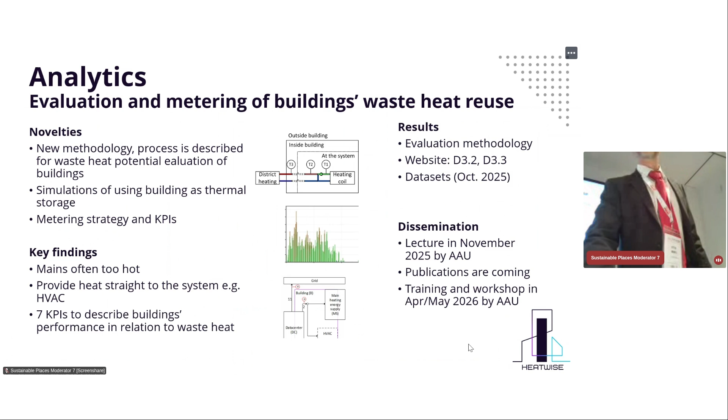Now comes planning. We developed an open source CFD tool, because the first thing is not to implement this whole package at once and at first, but let's see how you can improve what is already there.

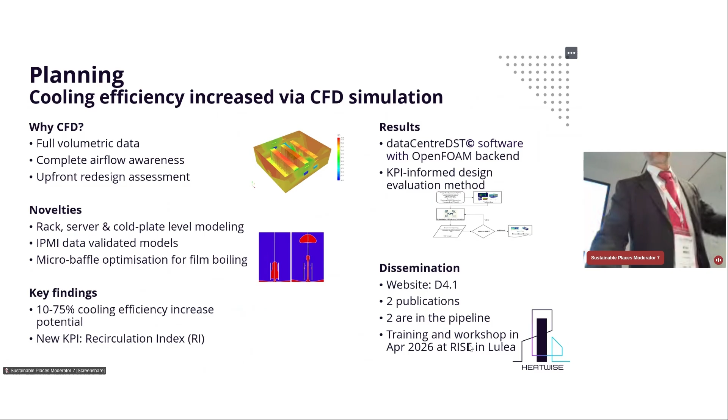With CFD open source simulation, we have several results of that. You can read more on the website about how to do the simulation without trying anything in reality. And that is probably the most important.

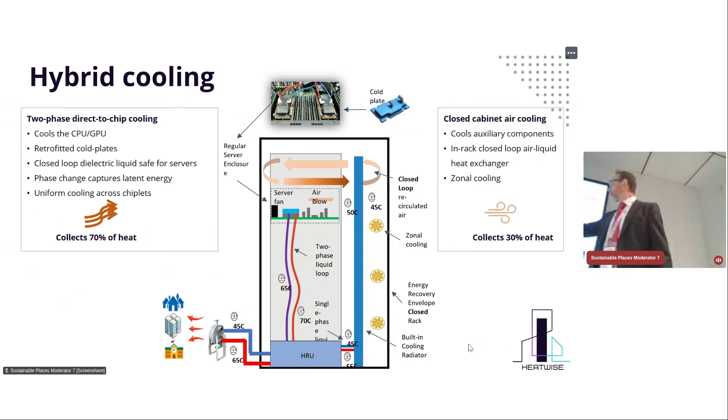So we are cooling with 45 degrees, not with 18. This is a serial, and we also have a parallel connection. 70% is captured by direct on-chip cooling, and around 30% of the total heat by the air component.

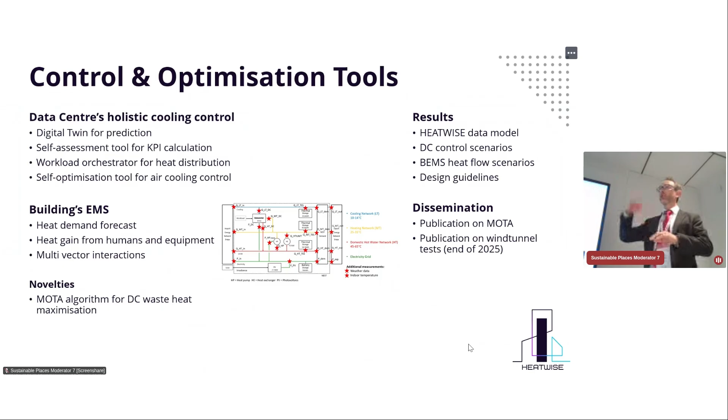Control and optimization follow us, with digital twin and heat demand forecast. That's the interesting point: if I know where to allocate the heat within the rack, I'm able to produce more heat, or less heat, lower or higher temperature. I'm able to set this to the demand of the building, so we are looking at what the building needs.

And then last, I wanted to ask a question, really, one more minute, last page, okay? How are you going to manage this? Is there a hierarchy between the building and the data center? What do you think it should be?

Before, everyone said the building is the king, and then came the data center. No, the data center is the king. So there is no king, there is king and queen, and they are all independently able to work, able to deliver on their promises, but they have to work together. And probably this is the most important right now—this is where our thinking is, how to coordinate between them.

Follow us on the website, sign up for the KPI, and later in 2026 we are going to come out with guidance documents on 7 use cases, how to implement our solution, which we believe is scalable from 500 kilowatts. In 100 kilowatt quantums, we can fit up to megawatt, 10 megawatt size. So that is the last page.

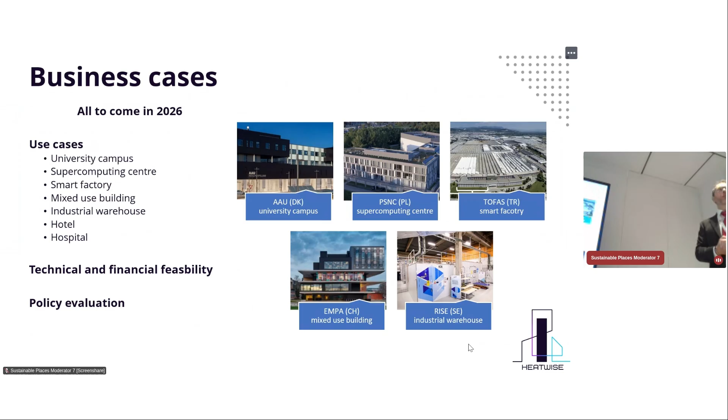Thank you very much. Listen to me—I was the last, but hopefully I was able to keep up your attention, and I'm looking forward to getting your questions here or online. Thank you, Sandra.